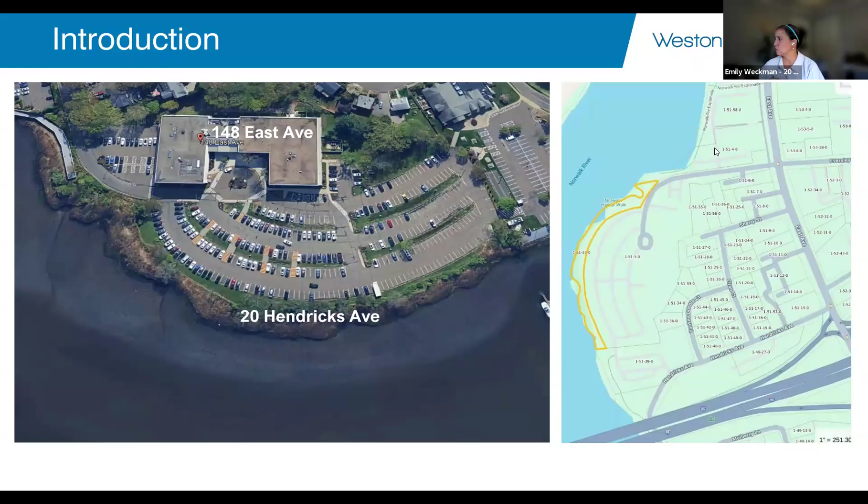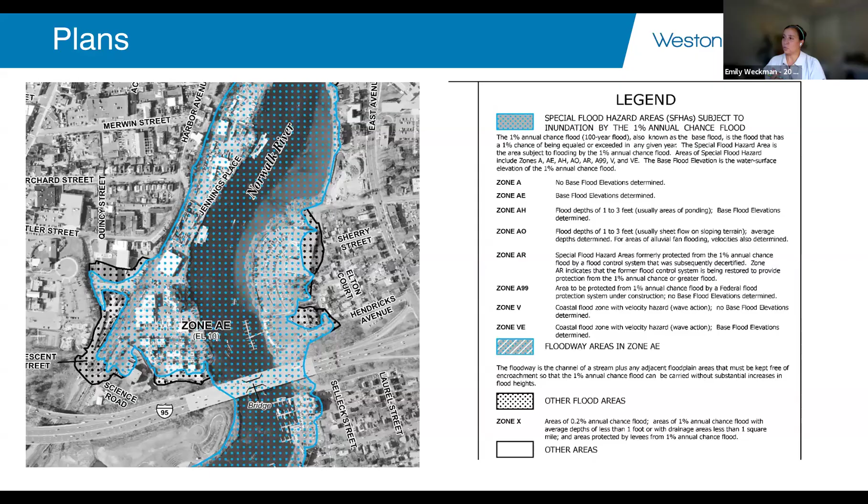We are in a FEMA flood zone, and we have completed and submitted our permits to CT DEEP as well as Army Corps in conjunction with our local permitting. This has been a long-term vision for the Norwalk Redevelopment Agency. It was previously approved with the Connecticut DEEP permit back in 2014. That did expire. Back in 2024, the project was revitalized at conceptual stages. And in 2026, we started to progress through design development to get to this point for local, state, and federal permitting.

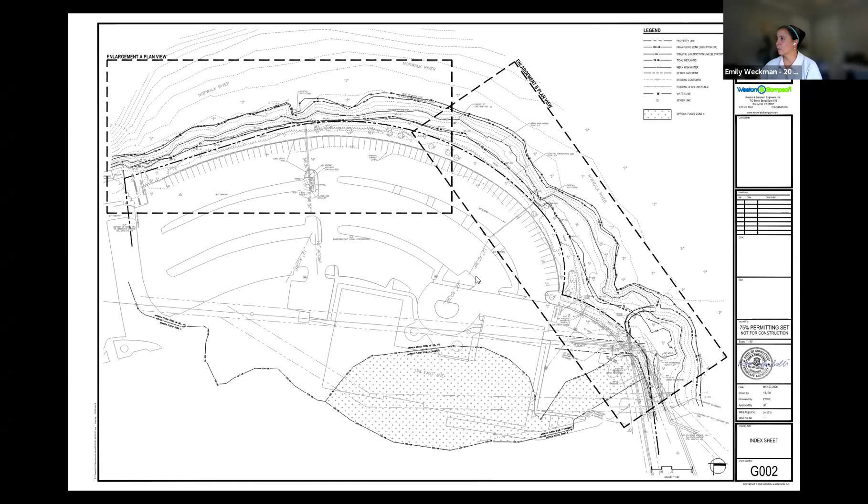This is the overall plan. I will be zooming into these enlargement boxes, but just so you could see the overall plan and get yourself oriented. Here is our proposed plan. It is a 950-foot long elevated boardwalk that would be approximately 12 feet wide, and that would be clear. And the majority of it is located at elevation 9. We do have to ramp up and ramp down at the north and south to meet those existing boardwalks and tie into it. But for the majority of the boardwalk, it is elevated above the existing vegetation.

Because if you have been there, right where that photo was, where the grass ends and then there is some dense vegetation, there's a slope. So we really don't have much room to do an at-grade walk. So that's why it's at that elevation 9.

The boardwalk would also have some guardrail protection on the sides. And we have 2 access points that would be just for maintenance. It will be gated off and locked for the normal public, but we have an access point on the north end and on the south end for maintenance reasons.

In addition to the boardwalk, we are also improving existing outfall conditions that are currently there. There's about 4 outfalls that we are improving the sedimentation and erosion control around those outfalls. So we're extending them from where they are. We're creating a larger outfall that is meeting current sedimentation erosion guidelines and can accept the volume of water that is flowing through them.

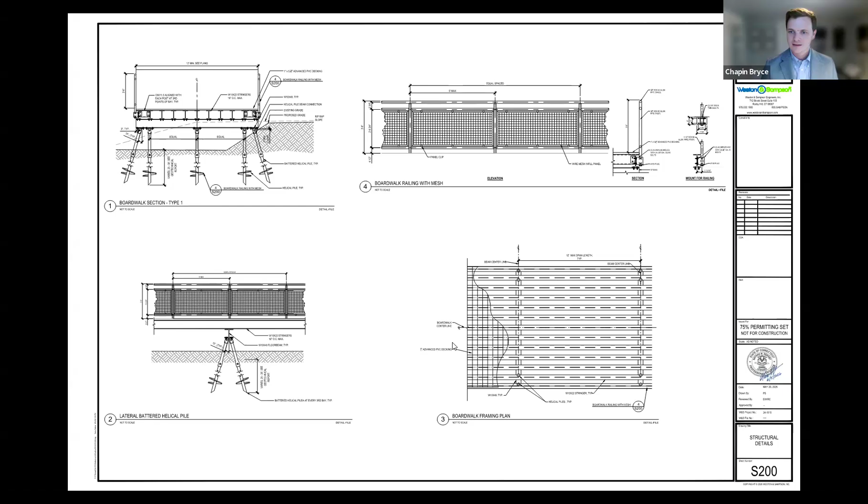That is the majority of what I wanted to share tonight, but I'm here to answer any questions. This is a cross section that shows some general construction details about how we're going to achieve this. But again, I'll turn the floor over to you so we can respond to any questions. Thank you. Appreciate that. Are there any questions for Ms. Weckman? All right. Well, I'll just note as a comment that I'm excited to see progress on this project. So thank you for your presentation this evening and for bringing these plans to us.

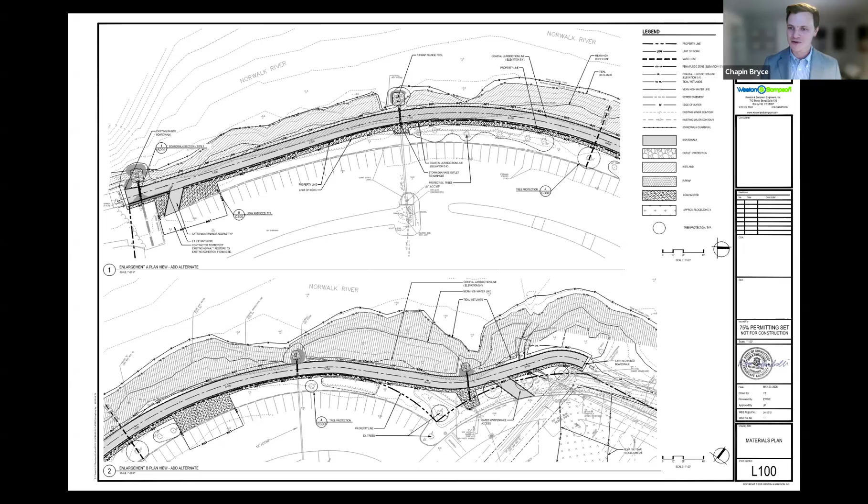You're welcome. Now, I am new to your commission, and every municipality runs a little differently. Do you like us to stay on through the entirety of the meeting, or what else do you need from me this evening? I appreciate that. So given that there were no commissioner questions, and unless you have anything else that you would like to add, I'll call for a motion in a moment here. We'll take action, and then you're welcome to sign off. So thank you. Okay, I appreciate it.

Great. With that, is there a motion for this application? So moved. All right, that's a move to approve. Right, Lou? Yes. Okay, great. And a second from Harvey. Excellent. Brian, do we have a resolution for this one? Yeah, what I'll note is we should just, to be careful, take 2 motions on this one to approve the 8-24 portion of it, and then one to approve the coastal site plan portion of it. Sure. So I'm assuming that this motion would be for the 8-24, and then we'll do the coastal site plan. Well, that's exactly what I had in mind. Right. That's what I heard Lou say. Harvey, you're good with that as a second still? Excellent. Okay. All right. Pull that up. Thank you, Brian. No problem.

So this is new. So you guys have not seen this in your memo, but hopefully it's nothing groundbreaking. Any modifications or comments on this resolution? All right. Yeah, just, go ahead, you're referring to it as the city council as opposed to the common council. Good catch. Excellent. All right. Brian, do you mind calling the roll for this one? Sure. And Commissioner Tabashnik is seated, or Commissioner Hempstead? Yes, seated for both these votes, since there's two, but yes. Okay, because JJ joined, so I think we have 8 regulars, and then just Anna's seated. Doug is not seated for this one. He'll be seated for the next. Thank you. Okay. Yep. Thank you.

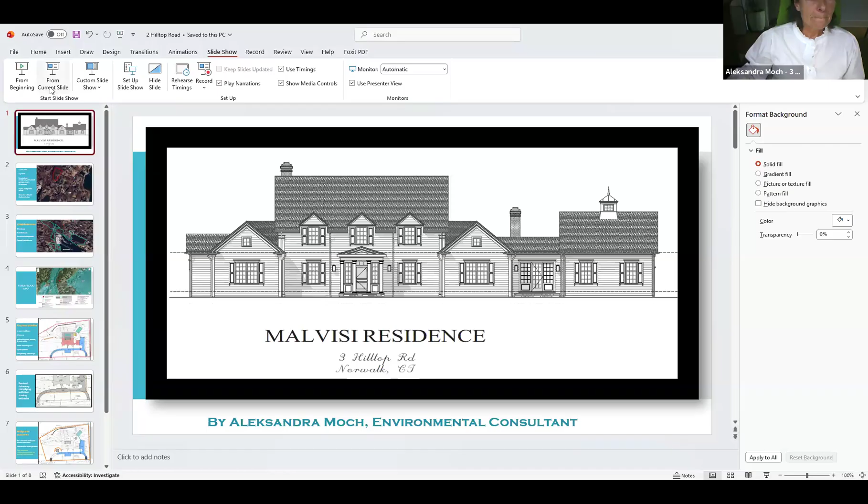Tonight I'm going to be presenting 3 Hilltop Road in Norwalk, and this is a proposal for a single family residence. Just to take a look at the location of the site, as you can see, it is highlighted in red. It is located on the top of a knoll or hill with some steep slopes and shallow ledge. This is a 2-acre site located in the A3 zone, which supports a single family residence, which is hidden here in the trees with a driveway. There's also a detached garage, which is also hiding within the forested area with a separate driveway. The area is supported by septic system and public water supply.

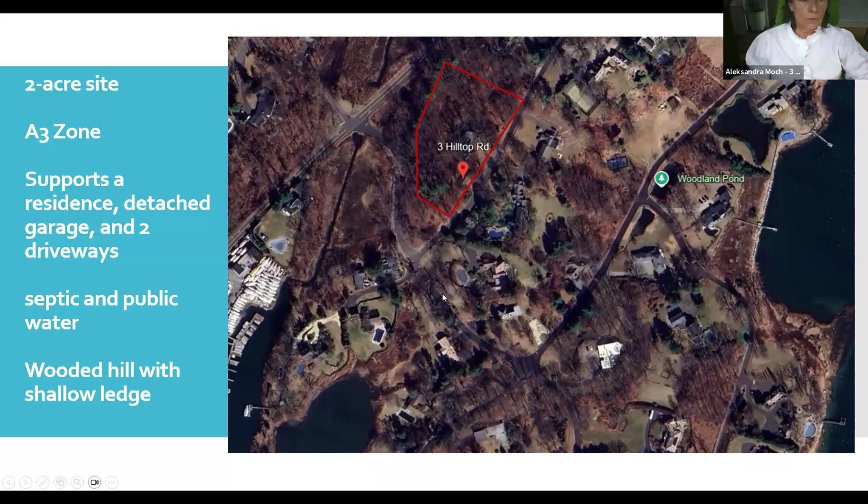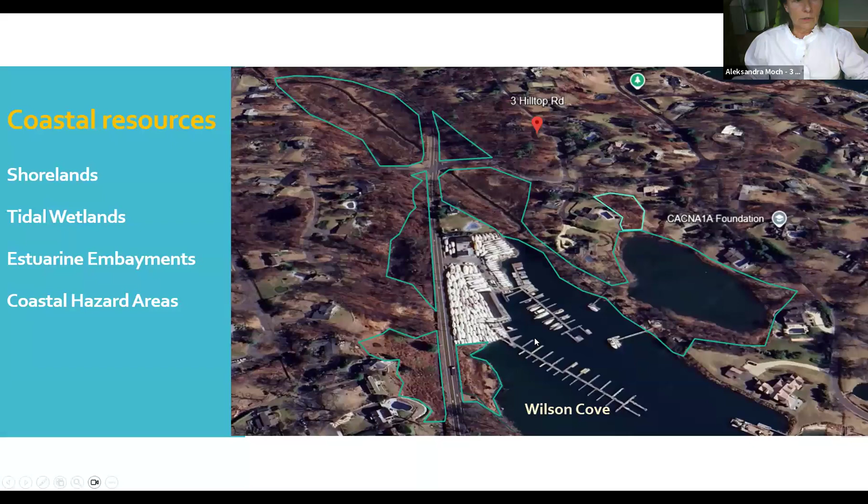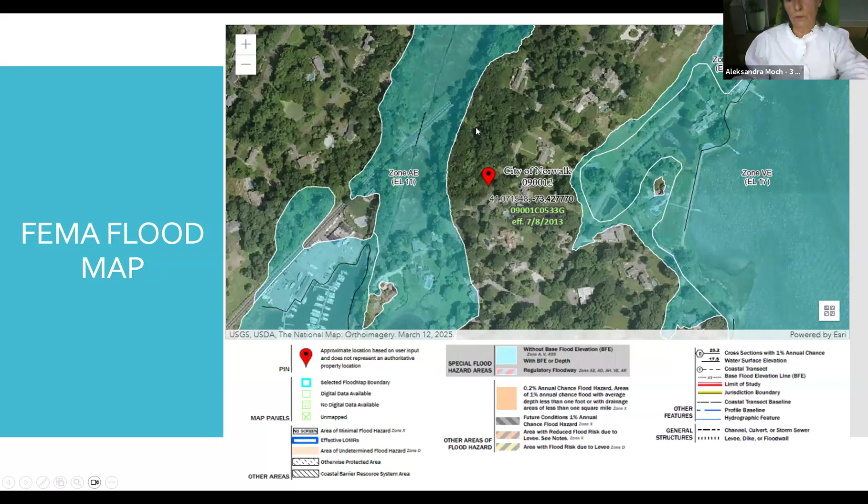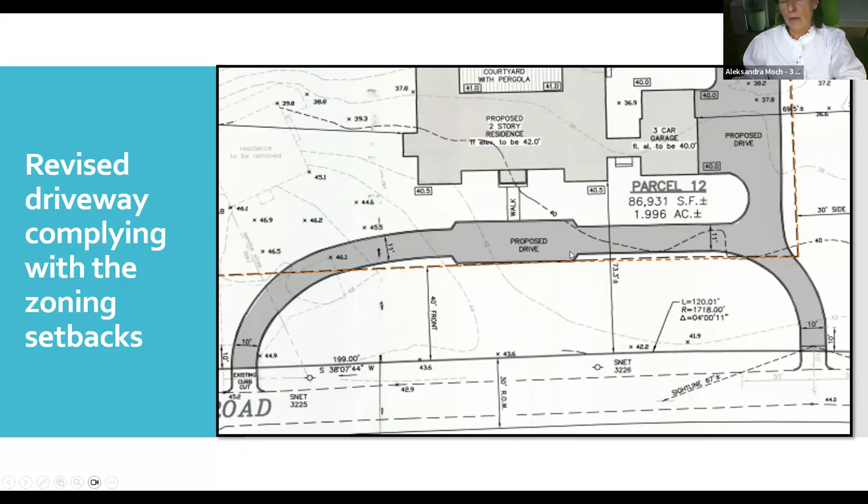Here's the revised driveway. As you can see, we managed to get outside of this zoning setback. This parking area now is narrower and outside of the setback.

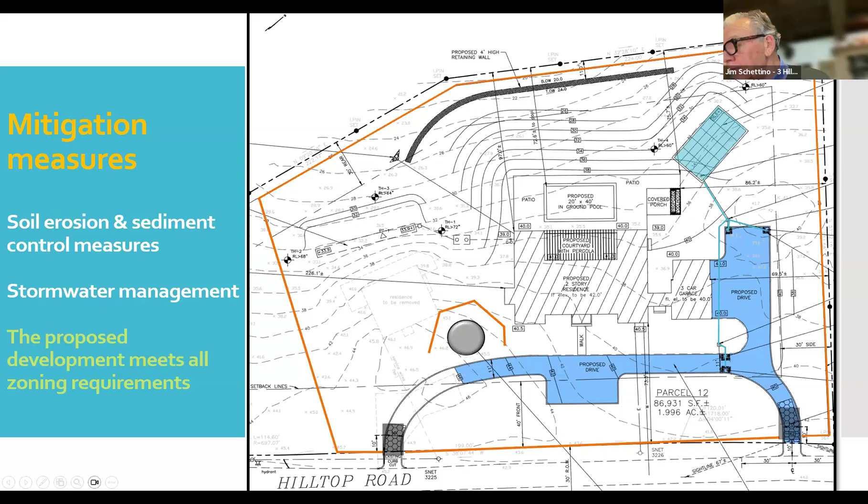The house is colonial revival style. We feel we complied with all the zoning setbacks, coverage, and building height. We went through that with the zoning department, and we were also approved by the Wilson Point Association for their architecture review process. So I'm happy to answer any questions as far as the architectural design or the site plan goes.

Excellent. Are there further questions from the commission? Hearing none, Ms. Moch or Mr. Schettino or Mr. DeVanzo, do you have anything else you would like to add for your application this evening? Just would like to say thank you for your review. Thank you. Of course.

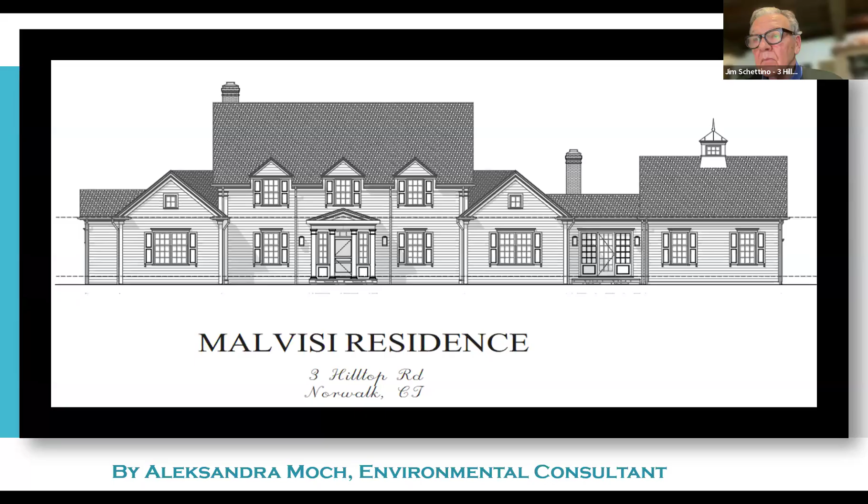With that, is there a motion for this application? Galen, is that a motion to approve? I'll take that as a yes. And as a reminder, Commissioner Hempstead is seated for this application. Is there a second? Thank you, Harvey. Brian, do you mind pulling up the resolution?

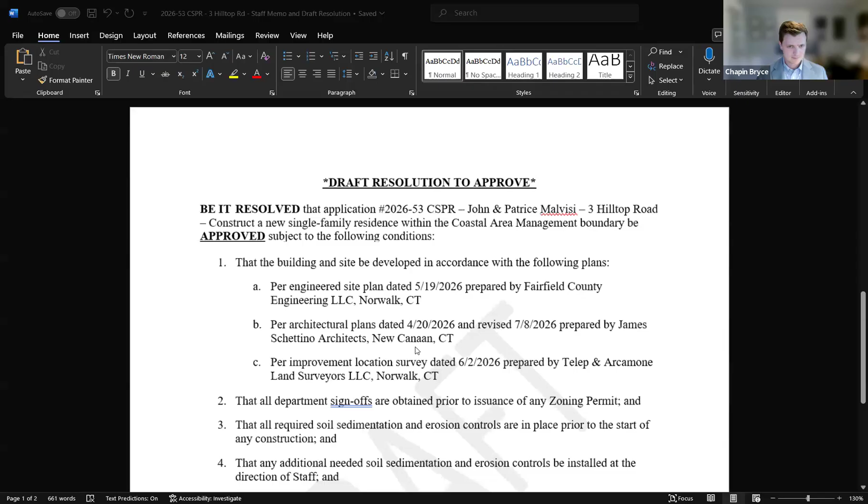Is there any modifications or discussion on this resolution? Hearing none, Brian, do you mind calling the roll?

Commissioner Hubers, yes. Commissioner Hempstead, yes. Commissioner Schulman, yes. Commissioner Lankowski, yes. Commissioner Wells, yeah. Commissioner Langalis, yes. Commissioner Jones, yes. Commissioner Jordan Byron, yes, and Commissioner Bryce.

Yes. It's unanimous. Excellent. Thank you for your presentation this evening. Have a good night. Thank you. Good night. Thank you.

All right, the next item on the agenda is 2025-49 special permit, Indian Hill RE LLC, 284 New Canaan Avenue, District 5, Block 46, Lot 76. Request to modify conditions of approval of special permit to expand the area of the previously approved contractor's yard. Report and recommended action. Who this evening is representing 284 New Canaan Avenue?

Good evening, this is Eric Bernheim. I represent the owners of the property. I'm an attorney at FLB Law. And we are here to modify our prior approval, which I'm sure the commission remembers. Let me share my screen.

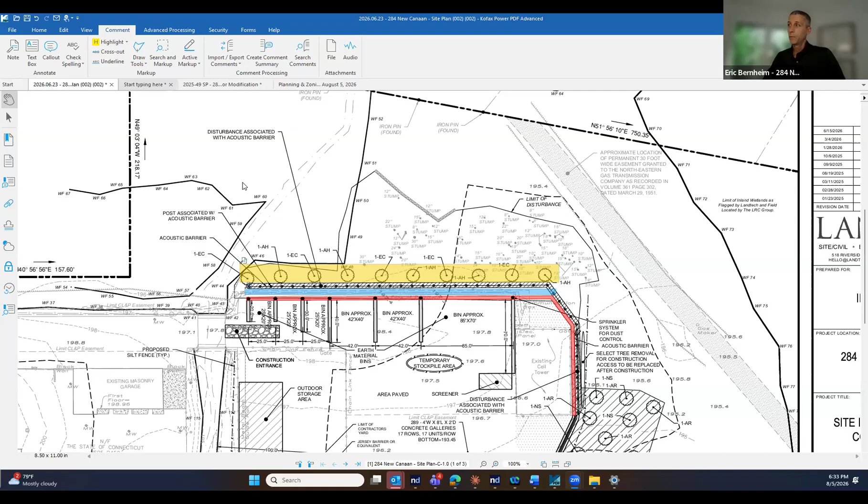So effectively, we're asking the commission for permission to relocate the acoustical barrier wall approximately 7 feet closer to the neighboring properties. We did discuss this with our acoustical engineer before we brought it to staff. They did review the plan and say that there would be negligible acoustical impact should we do this, meaning that the same acoustical benefits to the neighbors would be available with the timber wall being 7 feet closer to them, and then the bins being located where they were originally approved.

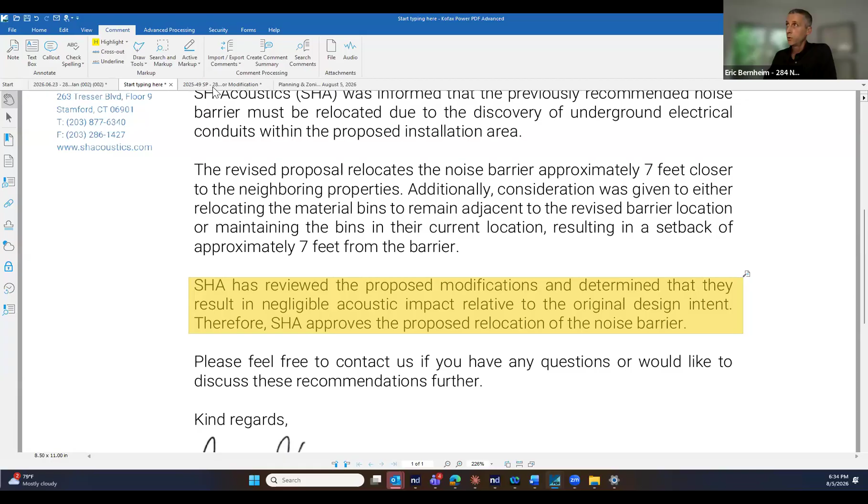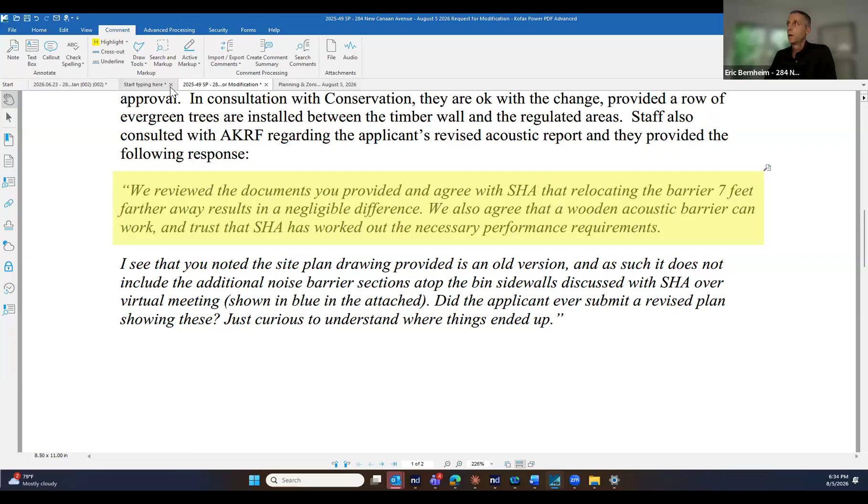I've also relayed this to AKRF, which was the commission's peer reviewer of our acoustical report during the modification hearing, and they agreed with our acoustical report, SHA, saying that there would be no additional or negligible difference in the acoustical benefit. They did point out that there were some suggested, I'll call them wing walls, that they had suggested on the sides of a couple of the bins that were not implemented in the approval. We have no objection to those.

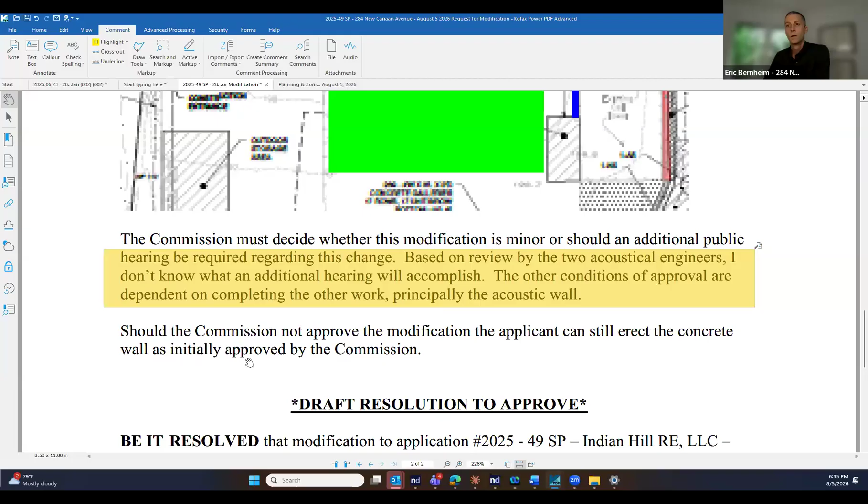So if your modification of this were to approve everything, we'd be happy to have these wing walls approved as the draft resolution prepared by your staff indicates. And we certainly agree with staff that based upon the two acoustical engineering firms agreeing that this will have no material impact on the adjacent neighbors from a sound standpoint, this is a minor modification that can be approved tonight. And we ask that you do that so that we can get this wall up and implement the plans that were approved by the commission, and the additional safeguards for the neighbors will be implemented as well once that happens. So I'm available for any questions.

Are there questions for Attorney Bernheim? Go ahead, Lou. You are muted, Lou. We can't hear you. Thank you. Sorry about that.

A question for the staff. When did we approve this? How long has it been? Well, the exact date, I'm not positive. It was earlier in 2026. I'm going to guess like March, maybe April. Okay, then question for Attorney Bernheim. Why has it taken so long to get to this point? Without prejudice.

Sure. The materials that we needed to implement the plan did take some time to obtain, and we had to have the timber wall milled specifically for us. You know, getting this many telephone poles, if you're not the electric company, is not the easiest task to do. We also wanted to wait for any appeal periods to expire before we started spending money on materials and the such. And then once we had the telephone poles delivered, we had done some initial site due diligence in preparation for the weekend work that we had been informing the neighbors was about to start. And we've been keeping staff informed as well. And that's when the electrical conduit was discovered for the first time, unfortunately.

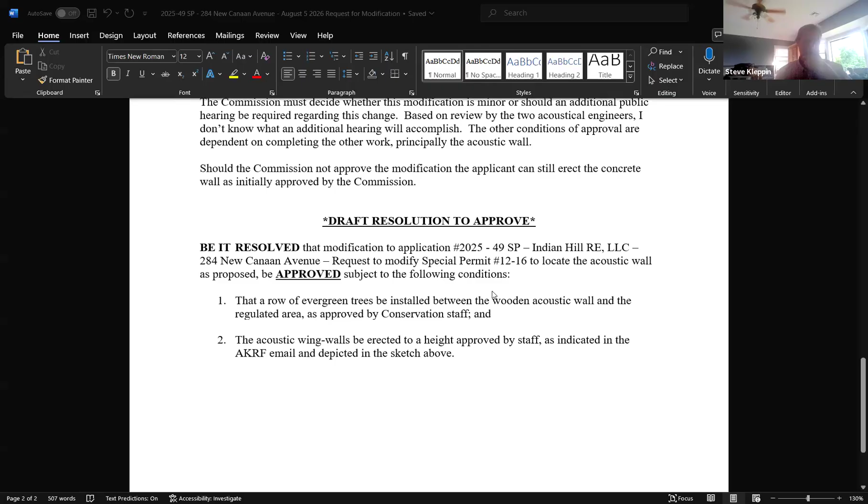All right. These are the two conditions that we talked about before. Anna, I recall you had proposed an additional condition. Yes. About how that space will not be used for any other purpose. The 7 feet buffer space between the back of the bins and the wall will not be used for any other purpose other than repairs as needed, for like wall repairs or bin repairs as needed. No storage, no other purpose. Something like that. And can we have something for Tammy's? I was going to get that next. Yep. Yeah, okay, great.

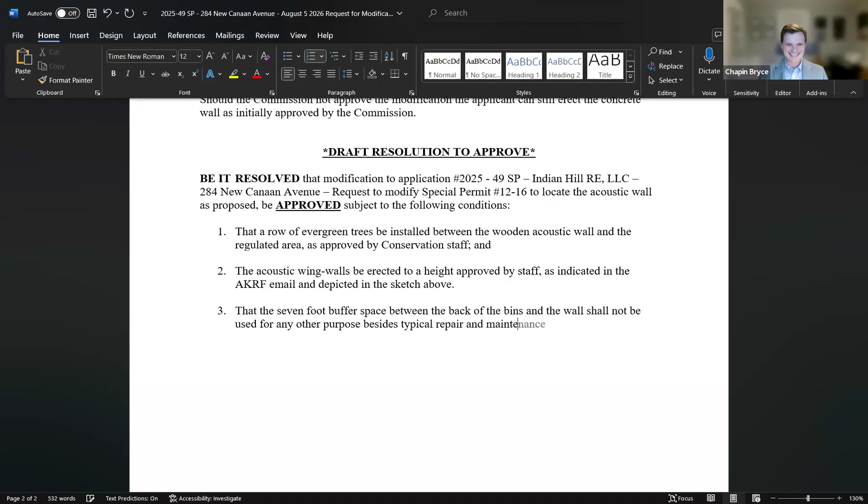Awesome. Tammy, I believe we had language in the original, but I don't have it in front of me, so I don't mind a belt and suspenders approach if you have ideas for language on the fact that the wall must be maintained and repaired if there's any damage to it, right? Is that the language you're looking for? Yes, that sounds good. I mean, it's partly there in number 3, the space in the bins. It does say maintenance, but I think we need to say that the wall will be maintained on a regular basis or something like that, so that there's no doubt.

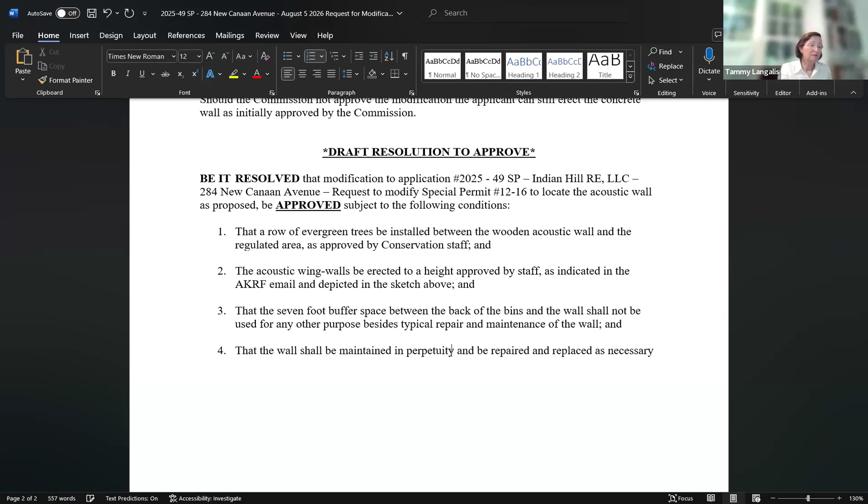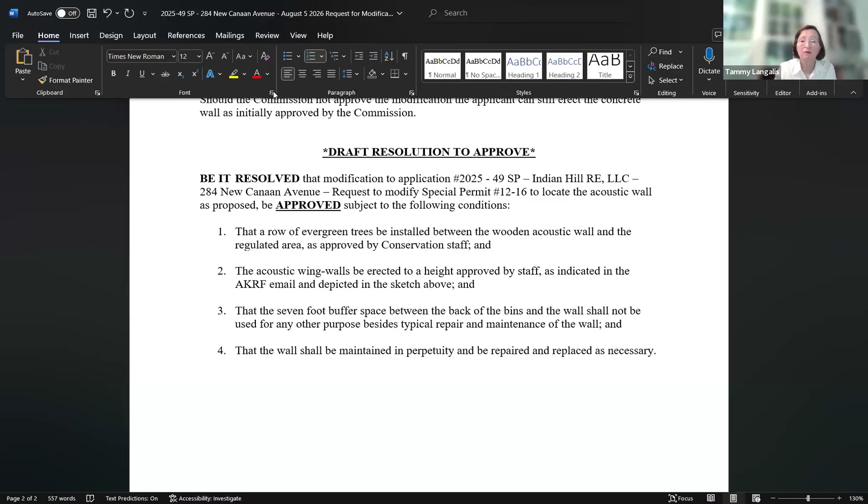Because I would include repair and replace as necessary. When they said it would last for 20 years or 30 years, at whatever point it dies, you might have to replace the whole thing. Steve, were you going to say something? Of course, I'm muted. You could just say maintained in perpetuity, and I think that covers it. Great. Thanks for the wording. Excellent. Are there any other modifications to the resolution? All right. Anna is seated for this. Tammy, are you okay with these changes since you moved? And John, are you okay with it since you seconded? Excellent. Okay. Brian or Steve, do you mind calling the roll?

Sure. I'm sorry, who was seated? Anna is seated for this one. Doug is not seated. Okay, I'll start with Ms. Tabachnik. Yes. Commissioner Wells. Yes. Commissioner Jordan Byron. Yes. Commissioner Jones. Yes. Commissioner Langalis. Yes. Commissioner Lankowski. Yes. Commissioner Ubers. Yes. Commissioner Schulman. Yes. And Chairman Bryce. Yes. All right, that passes unanimously. Thank you for your presentation this evening. Have a good night. Good night, everybody. Appreciate the help. Of course.

All right, so next on our agenda is 2026-52, a coastal site plan review for 21 and 23 Isaac Street. Though I propose to the commission that we first hear the public hearing, since my understanding is that the coastal site plan review that's proposed isn't something we can actually take action on until we decide what to do with the text amendment. Is there any objection to reordering to where we hear the public hearing first for the text amendment this evening?

Okay, hearing none, we'll move to the public hearing portion of this evening, which will hear 2026-48, Wall Street Opportunity Fund LLC, c/o Jason Milligan, zoning regulation text amendment to Article 4 to allow for properties within the CD4 zone that have received a site plan or special permit approval for dwelling units, which include dormitory, extended stay hotel rooms, and/or multifamily dwellings, to convert to any other type of dwelling units, dormitory, extended stay hotel rooms, and/or multifamily dwellings. Public hearing, report, and recommended action. Who here this evening is representing the Wall Street Opportunity Fund? Good evening. I'm here on behalf of the property owner.

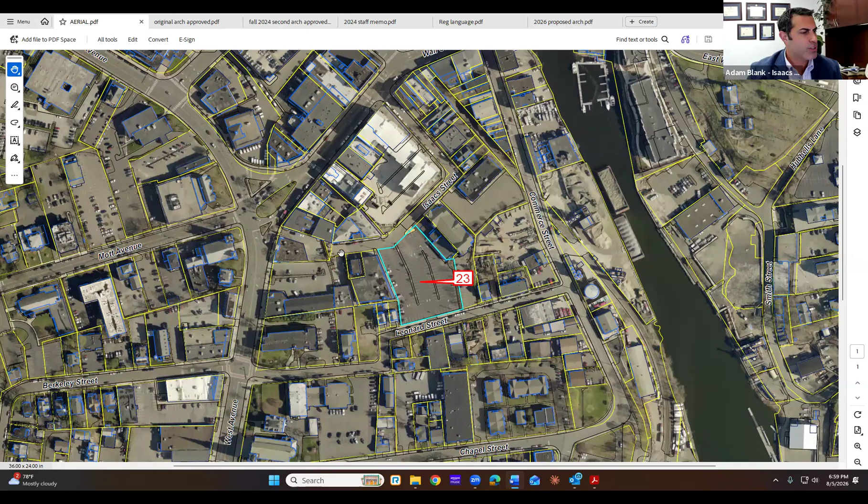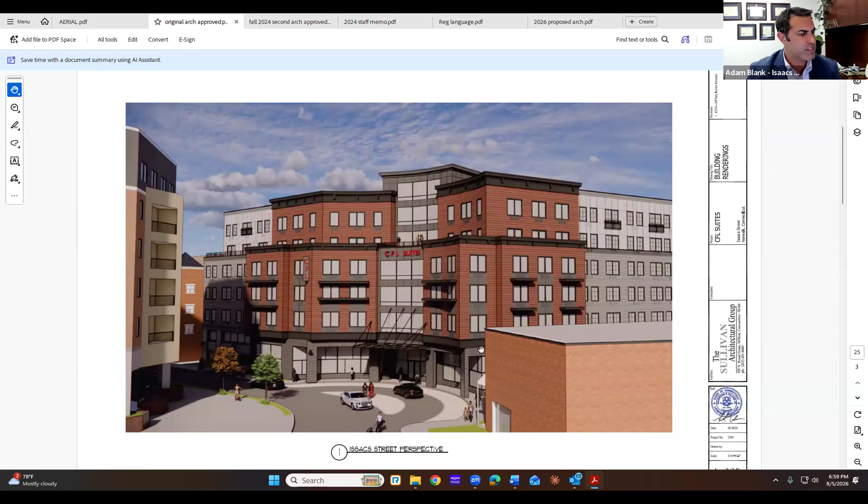So originally, this application was for a 210-room extended stay hotel with no apartments. This was the original project, 210-room extended stay. And you're on Leonard Street here, looking up, this is the Wall Street Place or the POCO project with a little public realm area. Up here, you are at the dead end part of Isaacs Street. To your left is the Wall Street Place new construction, and to your right is the Isaacs Street development. This is what was approved, 210 unit extended stay.

Shortly after this was approved, Jason purchased 24 Belden, and he proposed at 24 Belden to put up a hotel at that site. Now, we knew after the 200 unit extended stay that that's actually a fairly large size hotel for our area, and splitting it into 100 units at each site, one extended stay and one regular hotel, had a much greater chance of being feasible in the long run.

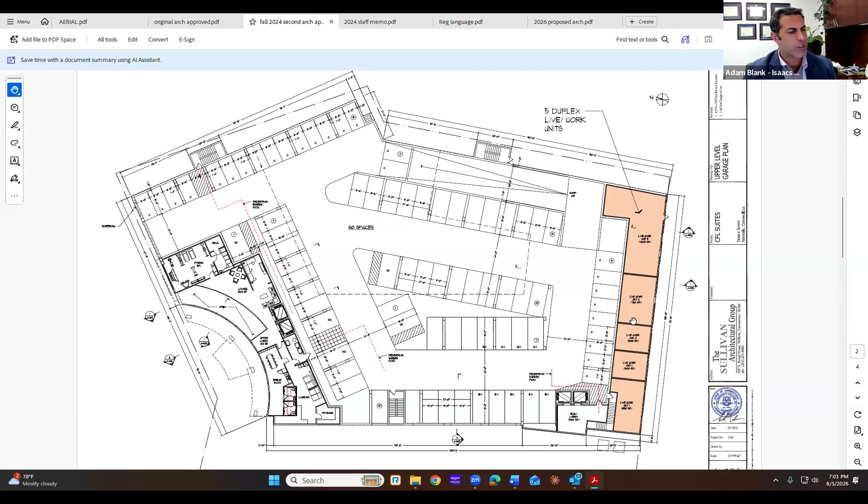So we went in at 24 Belden for a roughly 100 unit hotel, and we came back to you at this particular site and said we wanted to make minor changes and make the 210 room extended stay into a split with 100 units of multifamily on one side, 119 extended stay. We didn't actually even do new renderings because it was the same building, just changed the inside, the guts of it, and it did add some live work units along Leonard Street.

So that was it. We came in with a minor change to separate out the building, move 100 units from extended stay to apartments. You accepted that application. You, through your staff, in your staff memo back in December of 2024, found that the change would normally require an entirely new coastal site plan application, but because it was really just a change on the interior and it wasn't going to make a substantial increase in traffic, we didn't need to provide a whole new application. It's not a substantial change.

It was a minor change, and it was allowed as a minor change for the conversion of 100 units to apartment. That was approved in 2024. And that's sort of where we are today in terms of the approval. It's approved as 100 apartments, 5 live work units, 119 extended stay hotel rooms.

Now, since that approval happened, you changed your definition of dwelling unit in your regulations, and your regulations now say a dwelling unit is what was the normal definition, which would typically encompass a house, a condo, or an apartment. And then you added, it shall include dormitory rooms and extended stay hotel rooms. Okay, so an apartment, a condo, a house, single family, duplex, all of those are dwelling units, as is an extended stay hotel room or dormitory rooms.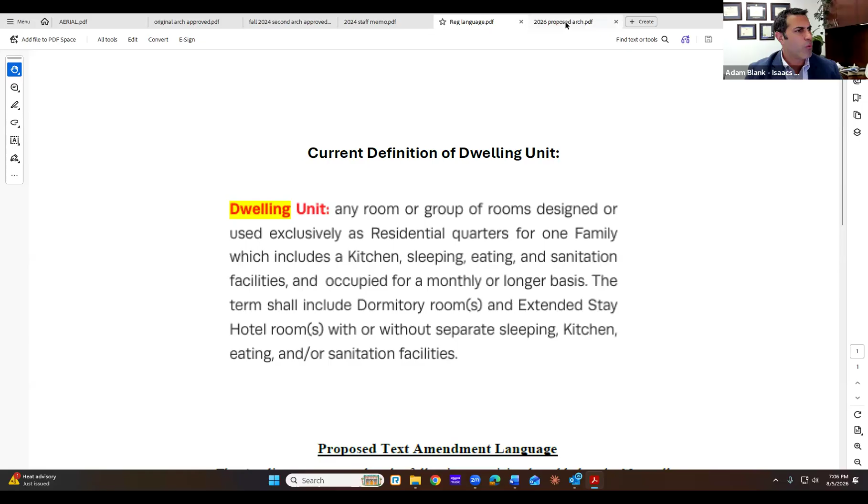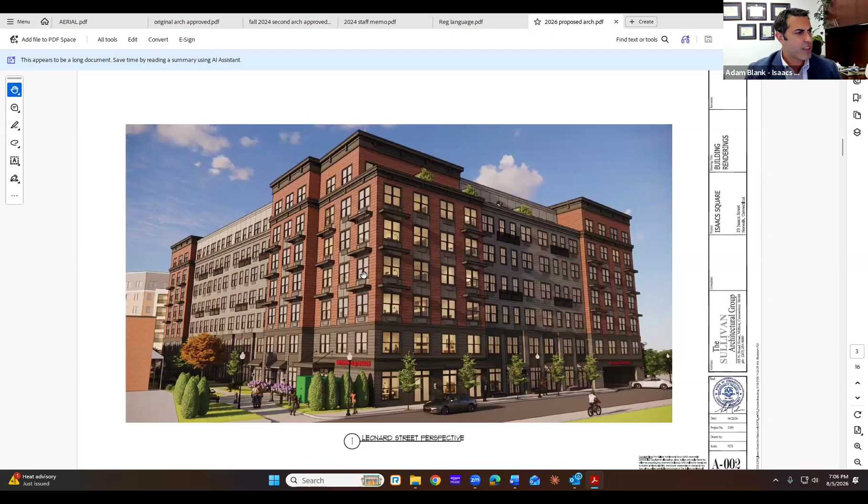So what does that look like? Well, lo and behold, it's the same building you've approved twice before. There's almost no architectural changes to the building on the exterior. The only changes are really on the interior.

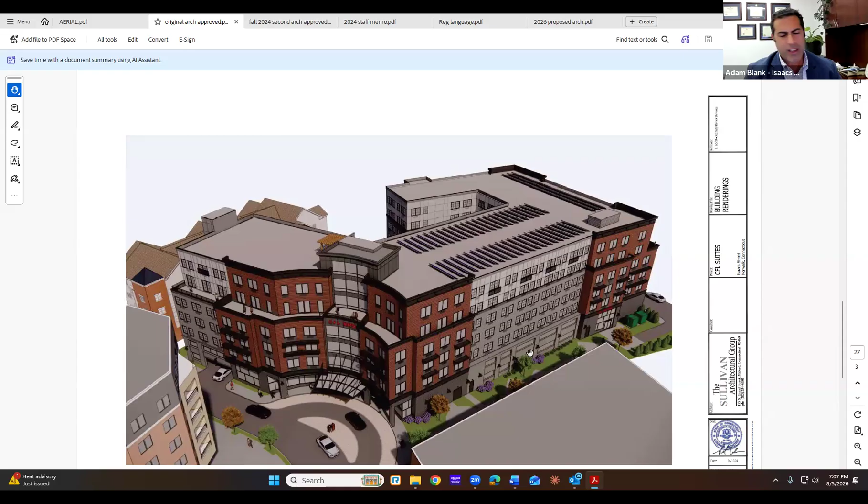One, there is a meaningful change on the exterior, a positive one, which is that this area here, which is the public realm space, in the original approval, you can kind of see it here. It's just like a wall or screening that shields parking at that public realm space. And there was criticism of that by your commission. I think Ms. Maldonado had a fair amount of it, as I recall, and the redevelopment agency did as well.

So this now creates townhouse units. I think some of them are about 1,200 square feet, so they're very generously sized units facing the public realm area. The outside looks a little bit nicer, I would say. It's pretty much the same.

On the inside, as is kind of clear, the unit mix would change. We would go from 224 dwelling units, which of course is the hotel and apartments combined, down to 207 units. Those would be a mix of studios, 1 bedrooms, and 2 bedrooms. That's a reduction in your dwelling units by about 17.

With the new plans, we also plan to add additional parking, which will be within the building's approved footprint, going a little bit lower and a little bit higher on the interior. So we've got 162 spaces approved. With the new plan, we would bump that up by almost 50 spaces to about 209 spaces.

So between the unit count reduction and the increases in parking spaces, this project isn't going to have any more impact on the availability of off-site parking or public parking than the already approved project would. You're getting less units, you're getting more spaces. It's going to be roughly neutral in terms of what impact it might have off the site and parking.

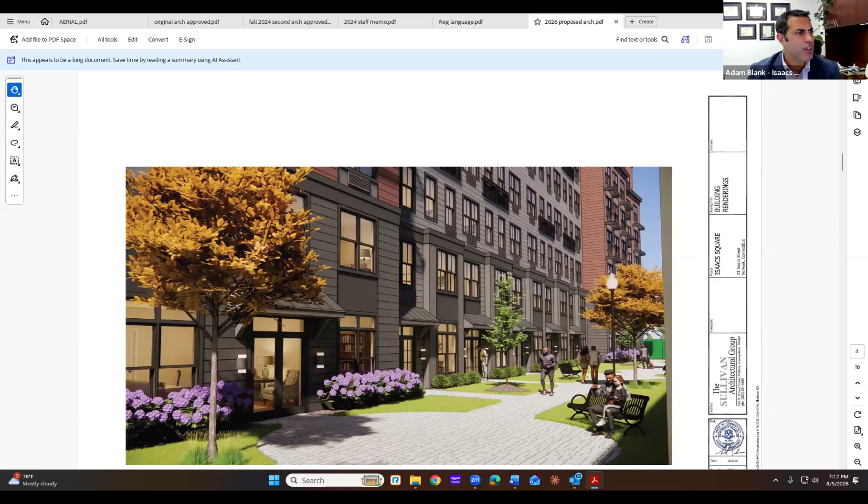If prompted, I'll go into that in detail, but otherwise I'll just refer back to the narrative, which should be part of the record. I'll also note that you should have a letter of support in your files from the factory underground.

And then I'll also just show you the proposed text language change that we're asking for, which is to say if you've got an approval for dormitory rooms, extended stay hotels, or multifamily, but you haven't obtained a zoning permit, you can convert any of those uses to any other dwelling units, so long as your total collective number of dwelling units does not increase.

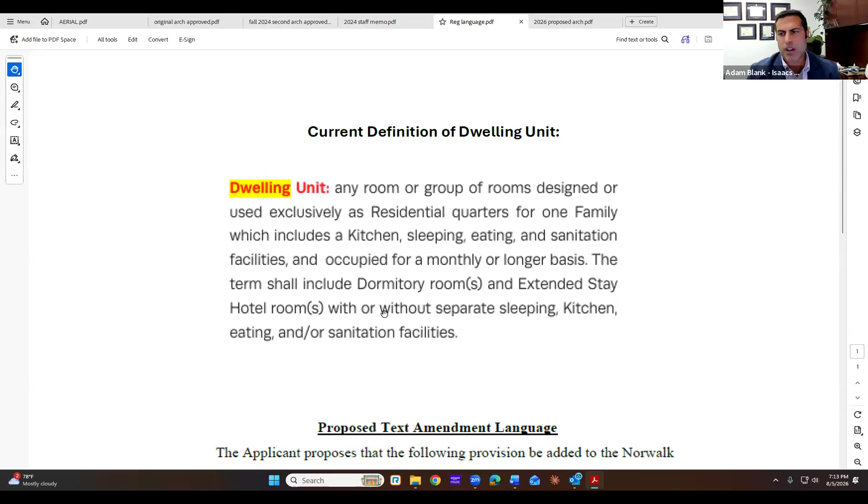And I'm not certain that it actually only applies to this site, but it at least predominantly applies to this site. And in the future, because your other dwelling unit reg has been changed already, you won't have any of these coming in the future. This is just looking in the past of what's been approved, because otherwise it's already moot based on the change in the reg.

Get this open if I can somehow. I think I can stop sharing. If I can. Did it stop? Not yet. There we go. Yep. All right.

Okay, and I think that's the bulk of the presentation. If you've got questions for me or the team, I'm happy to do our best to respond. Thank you. Go ahead, Lou. You are muted. Thank you.

Attorney Blank, why can't we simply approve the 207 or so units as multifamily without changing the zoning language? Well, we've had a little bit of a debate about whether you can or you can't. I would say that an argument exists that yes, you can, because under your regs now of what a dwelling unit is, we've got 224, so this would be less, and you can do that.